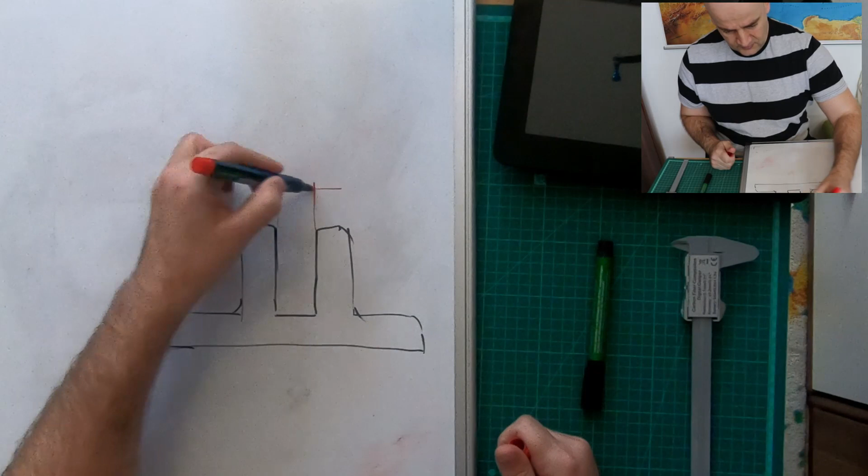Okay, let's see. So probably I will use this flat surface for it, so something which I will place here. I'm just thinking probably it will be in two pieces. The most important part will be these two parallel surfaces. Here I will insert this frame, and something like this. Of course with rounded edges, but I will add that later. The most important dimension will be this. And of course I have to think over how high this part here should be.

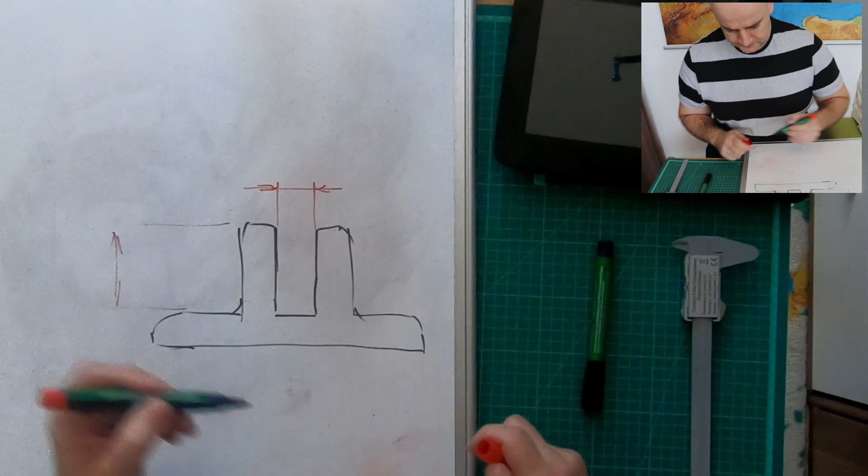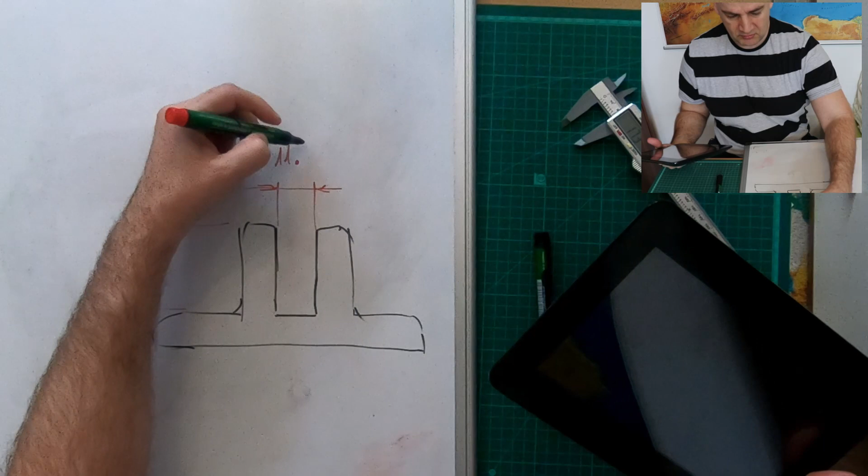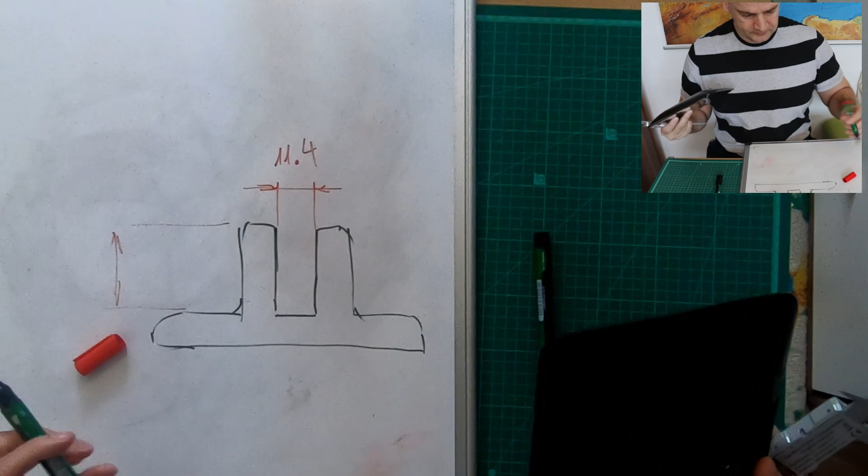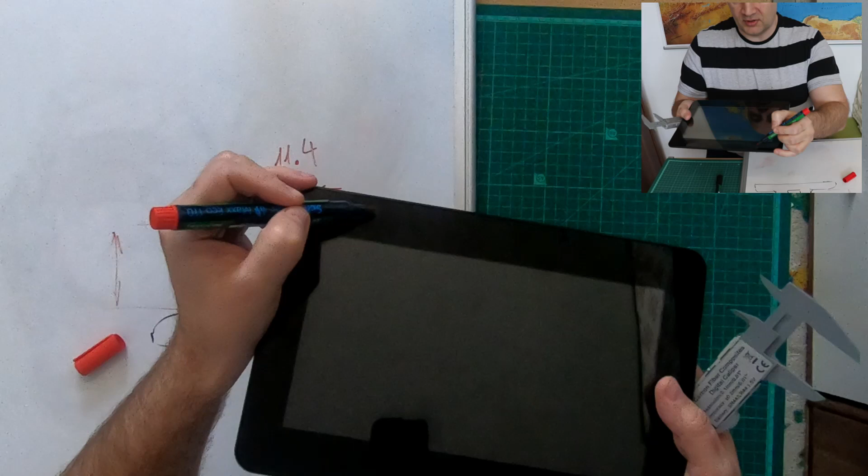Let's measure. 11.1. Oh, it's not equal. 11.3. 11.4. And on this side, the maximum is 29. I have to be careful. There is some kind of sensor, maybe the light sensor that turns it on when it's dark. But if it will be two pieces, it will be here and here, and here the maximum depth is 65. 25. That should be enough.

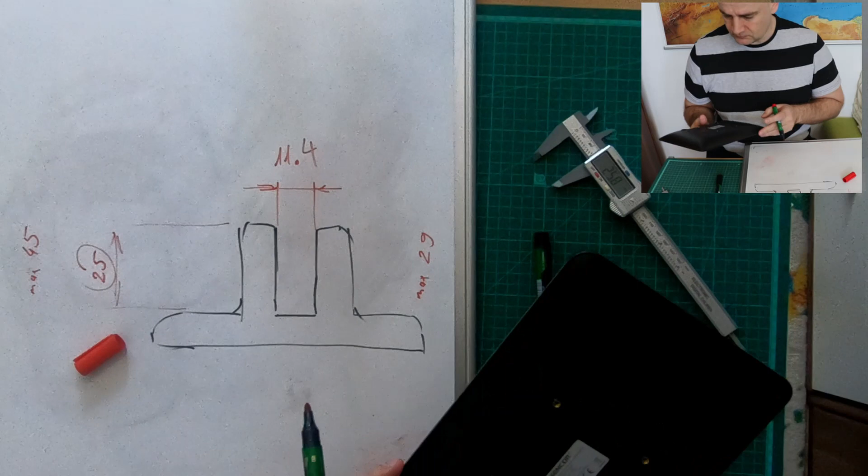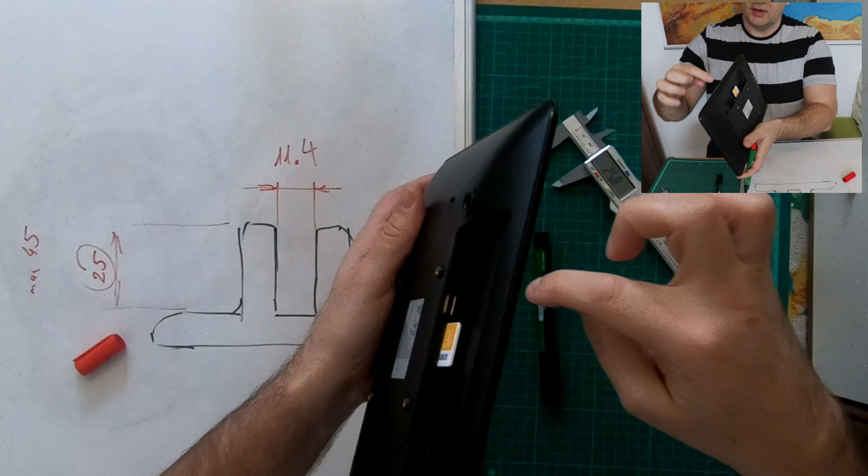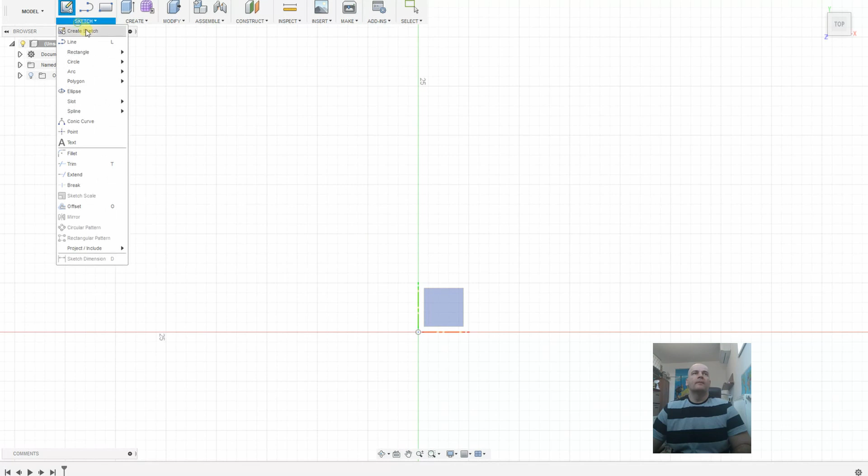Okay, one more thing. I was thinking this is the flat parallel surface. There is some kind of curve, but it is hard to measure, so I will ignore it. I will just create this as part of some kind of rectangle. Okay, let's do it in Fusion 360. Let's start a new sketch. Most important is to create a construction line. It's the symmetrical line. So it's a construction line. Let's make it fixed so it doesn't move when we do other operations.

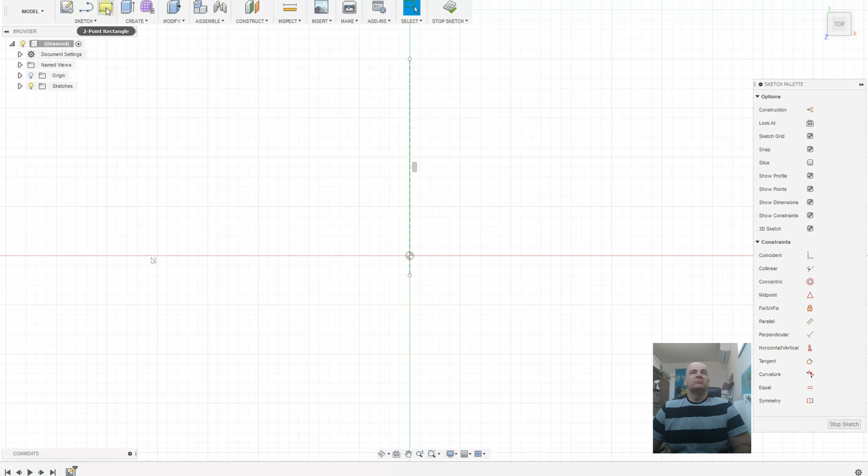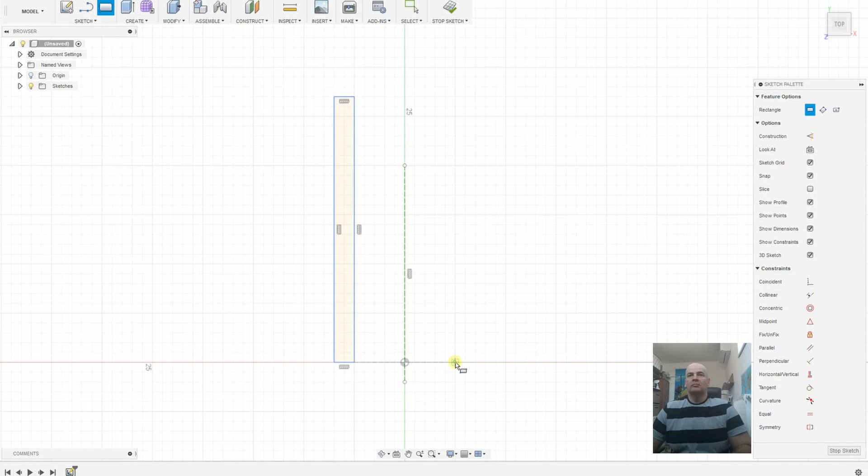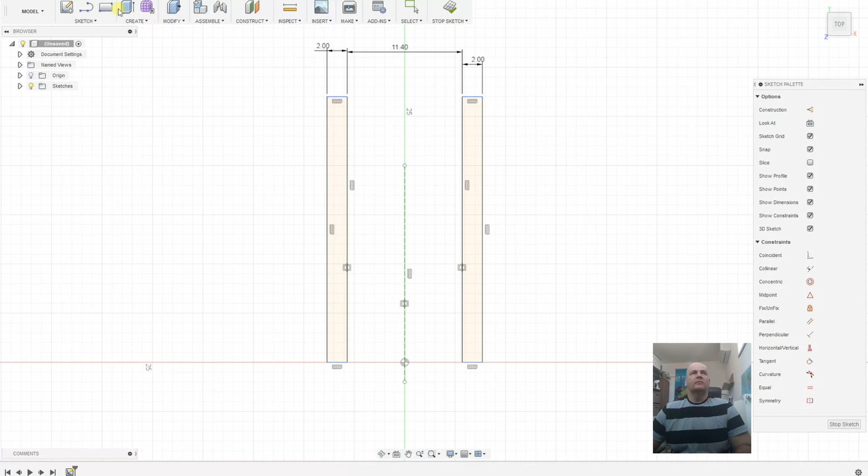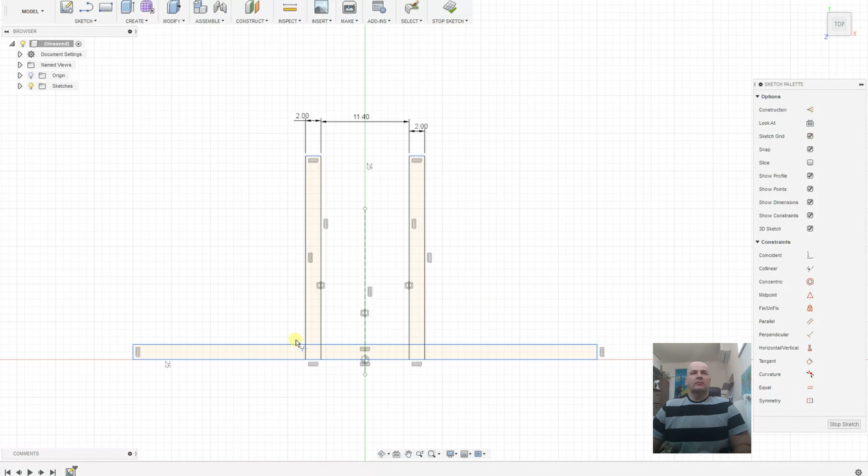Let's start drawing with rectangles. From the bottom. Okay, now let's make this symmetrical. And the distance between these two lines is 11.4 millimeters. Okay, let's keep this dimension 2 millimeters. Also this one here. That's it for now. Let's draw the base. 60 millimeters should be enough. Yes, I think it will be okay for the first try. We will see whether I should modify it or not. Let's trim the lines we don't need.

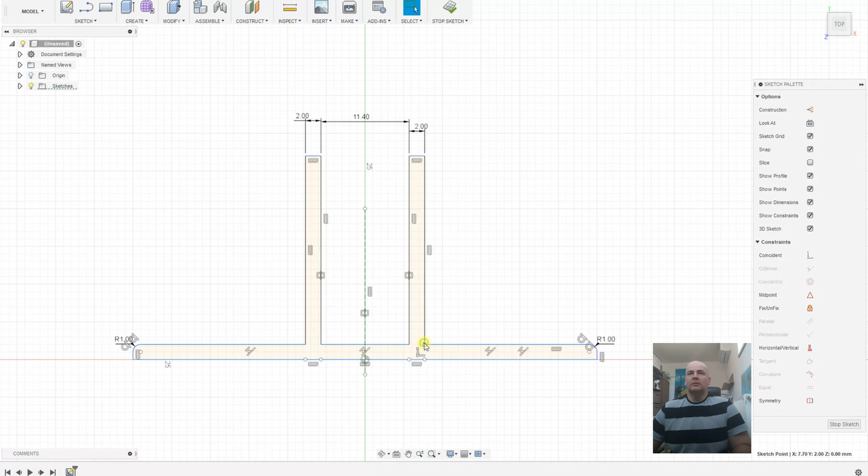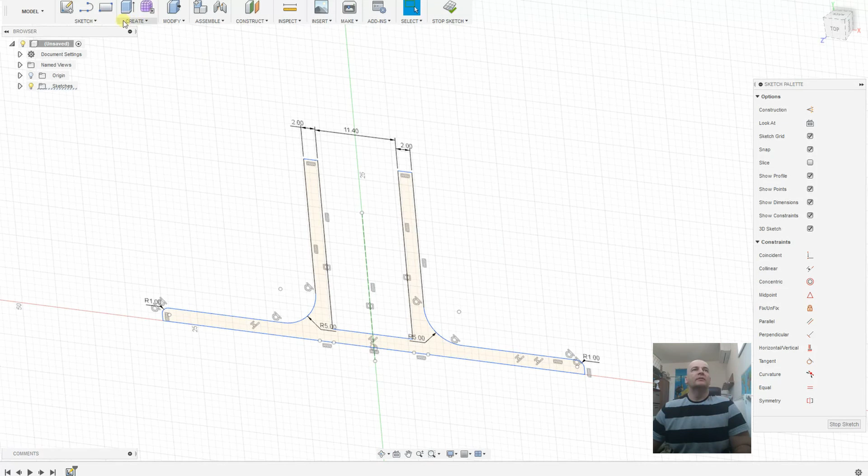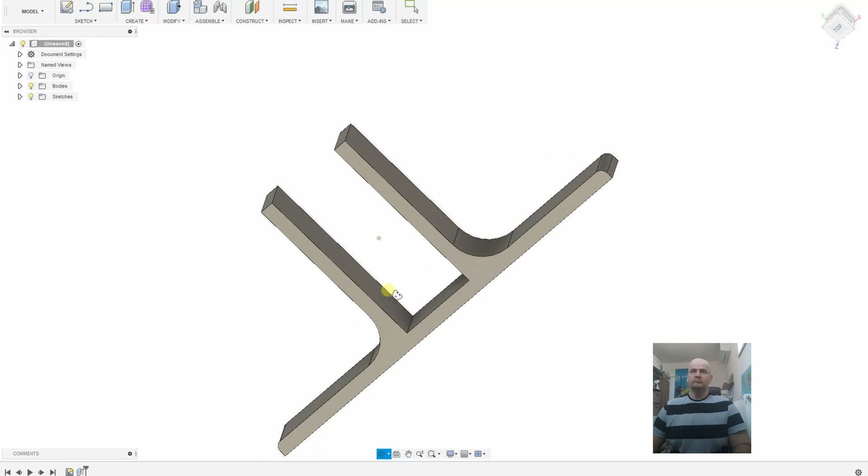Okay, let's round the edges. Fillet. 1 millimeter. Yes, that's very good. 1 millimeter. Maybe here I should add more. 5 millimeters. Okay, that's very good. This is it. Let's give it the third dimension. 6 millimeters. Great. Okay, make 3D print. Let's save it. Digital frame. And now let's slice it to prepare this STL file for 3D printing.

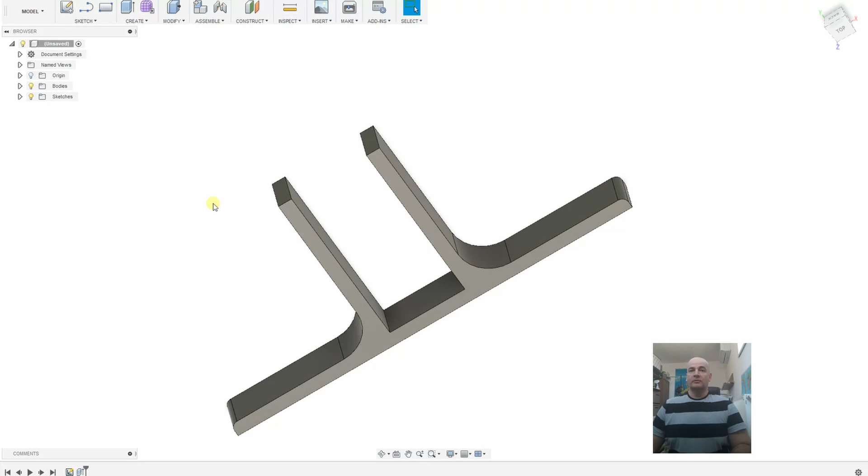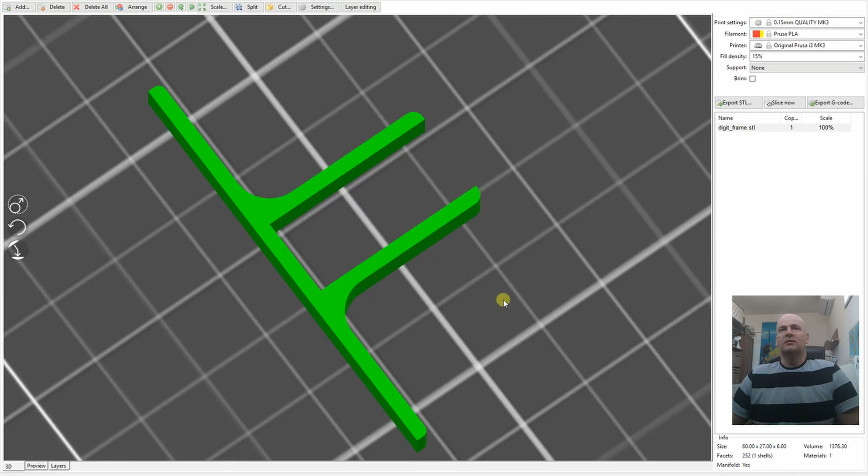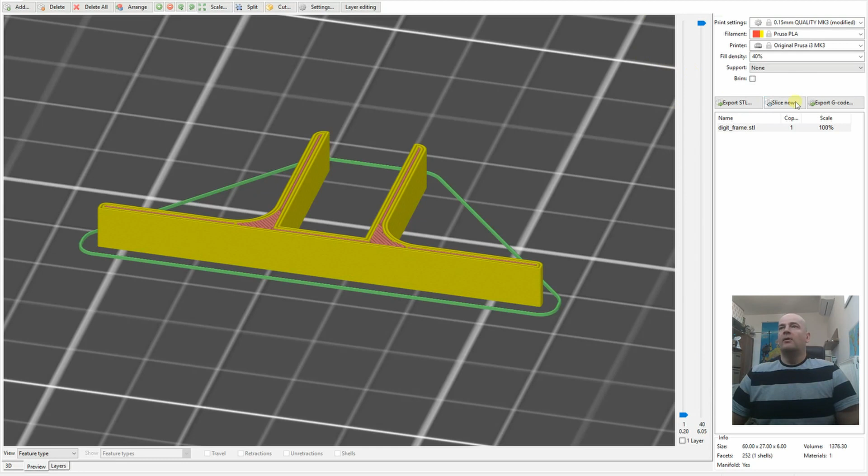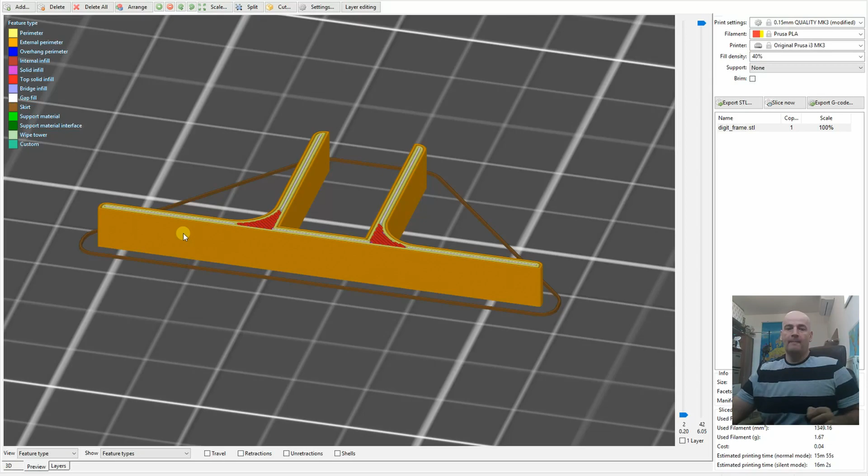So I imported this STL file in the slicer now. I only added these rounded edges here. It would be nicer. Let's choose. Okay, it will be PLA, 0.15. Okay, that will be it. Slice. Let's preview. I will raise the fill density to 40% just in case, because it doesn't use too much filament. Okay, slice again. So this is the procedure. Okay, export G-code. And let's copy the G-code to the SD card of my Prusa 3D printer. Okay, the G-code is now on the SD card.

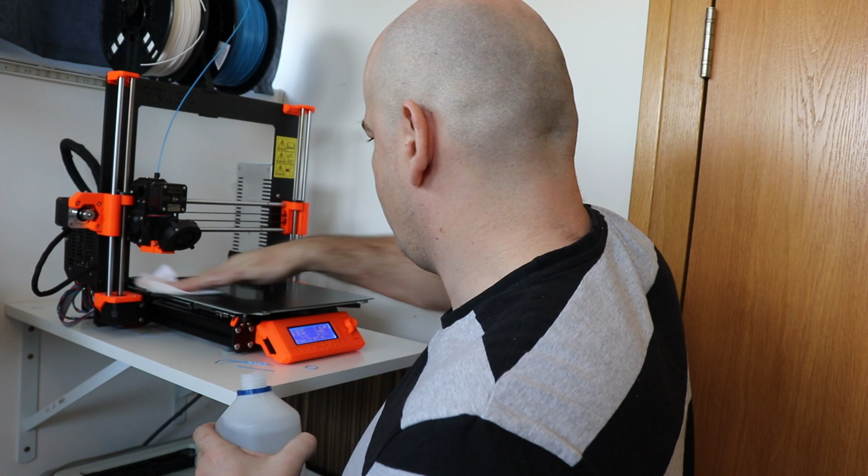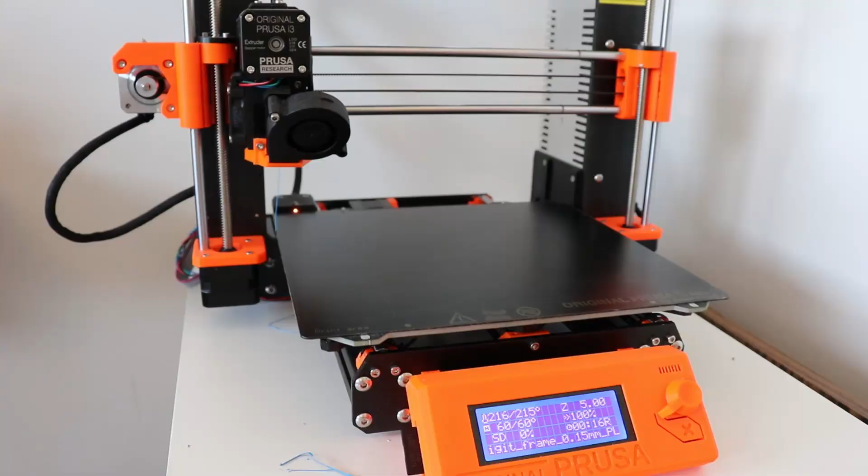Let's clean the bed, a very important part. Isopropyl alcohol. Print from SD. Digital frame holder. It's preheating now. Oh, I forgot to change the color. It will be in blue, but my wife doesn't like blue. We will see whether I should print a new one or it will stay blue. Okay, the temperature is now ready. It's leveling the bed. And according to the slicer, it will take approximately 15 minutes per piece.

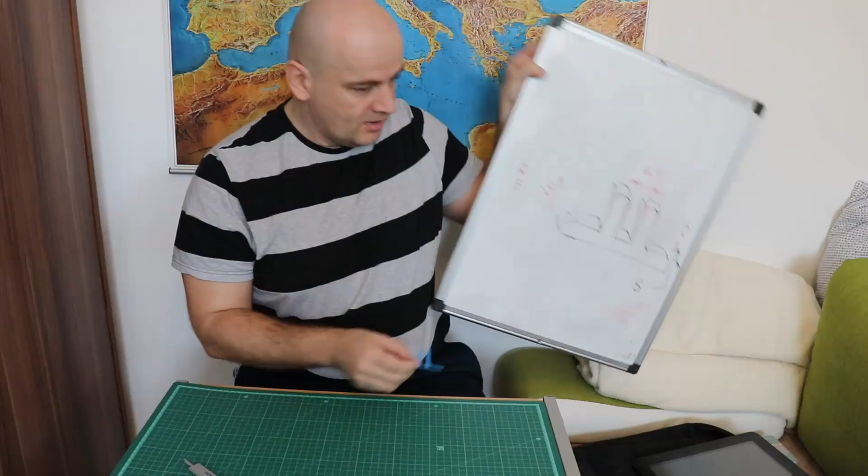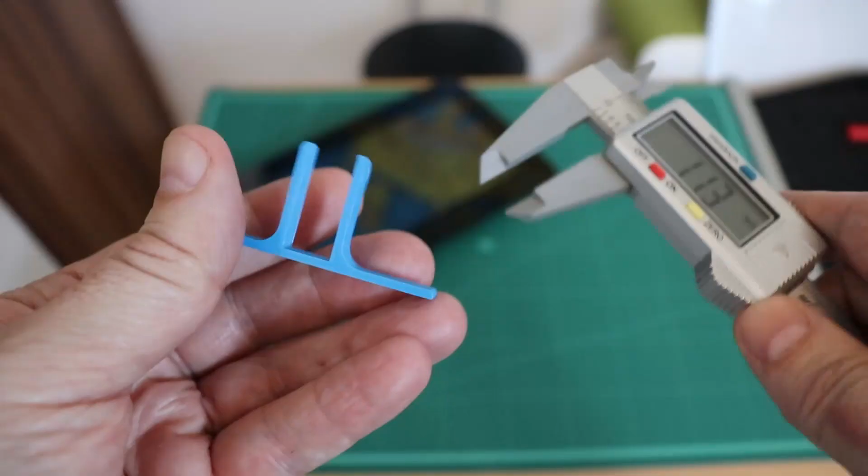The moment of truth. And from this we get this. It's not the same, but let's see if it works. First, I would like to check this dimension. It should be 11.4 millimeters. I thought it would be a little bit smaller. Let's try if it works if I press it in the middle. Wow. Okay, well, the only problem will be that it's blue. Great. Let's print the other one. One thing I am thinking is that maybe I should add another support here because it is too soft.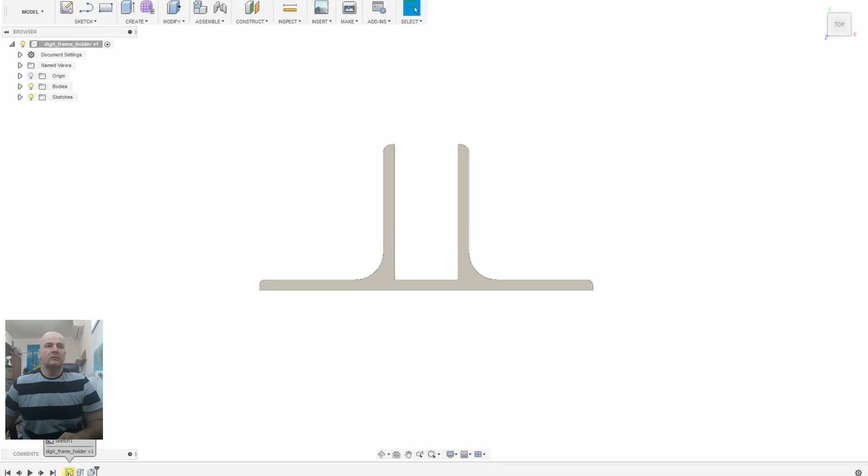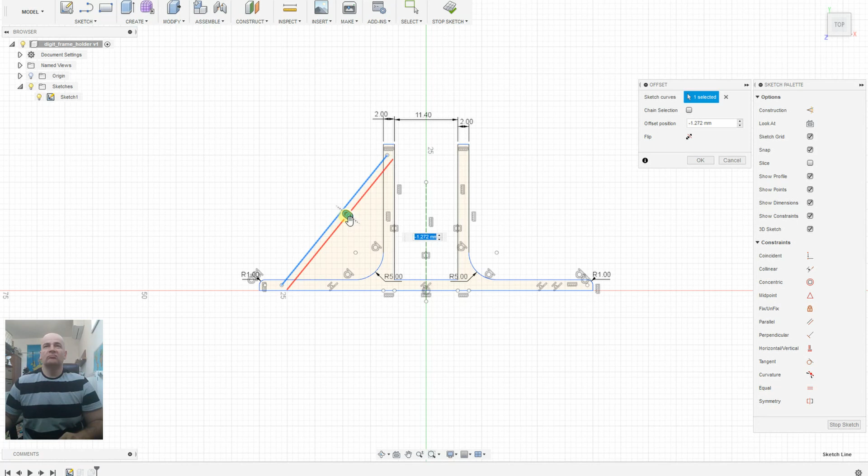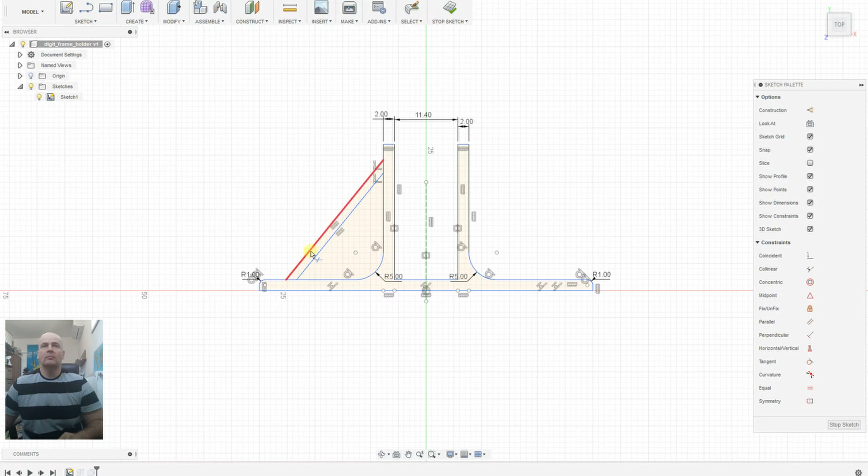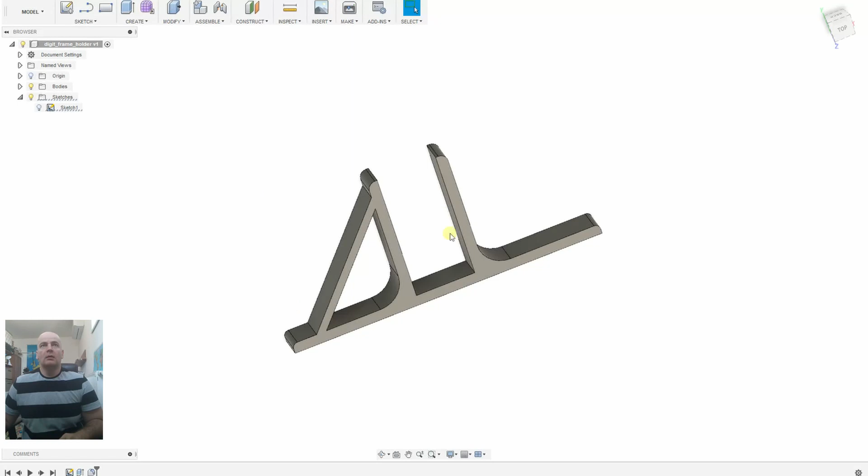Okay, I printed the first holder, but I want to add a support here on the back side. So let's add it to this sketch. 2mm, 1.5. No, minus 1.5. Okay, let's trim the unused part of the lines. That will do it. Okay, I will keep the first version, and the other part, because I need two holders, will be with the support on the back side. Okay, let's print it.

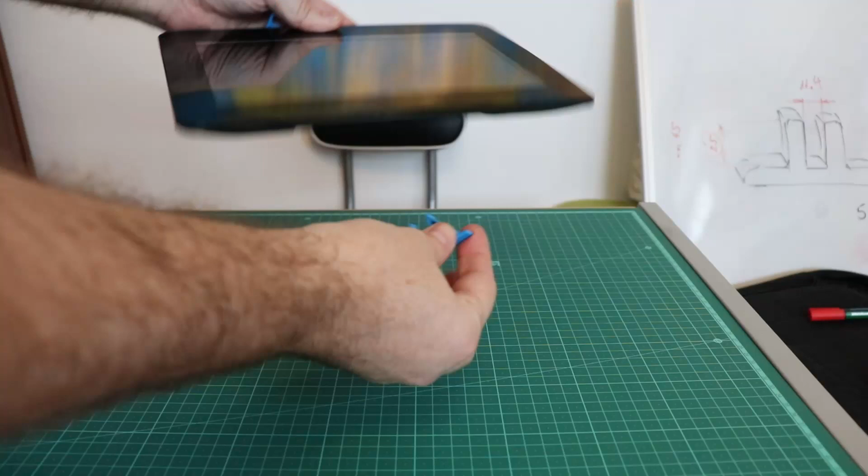51% is printed. It works. Great. It works, and this was my first attempt. So my first 3D printing project, mission completed. The only problem is I'm afraid my wife won't like the blue color. But we will see.